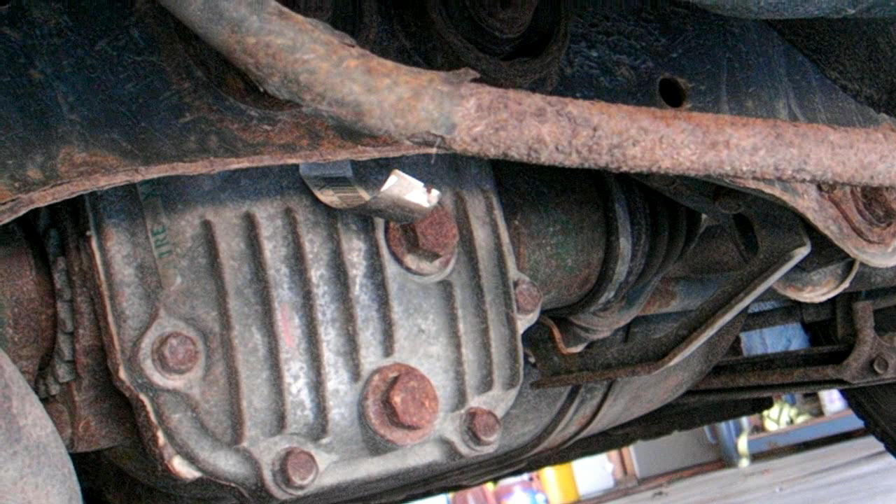Another thing on your Subaru maintenance list should be to check your differential fluid. It's filled with 80W90, and that bottom bolt is a drain hole, and the top bolt is a fill hole. You want to check that once every couple of years, unless you have a leak, then you're going to want to check it more often. But it should be filled to the bottom of that top hole. So when you take that bolt out, you should fill it until it starts dripping out that top hole. And the car should be on a level surface when you do this.

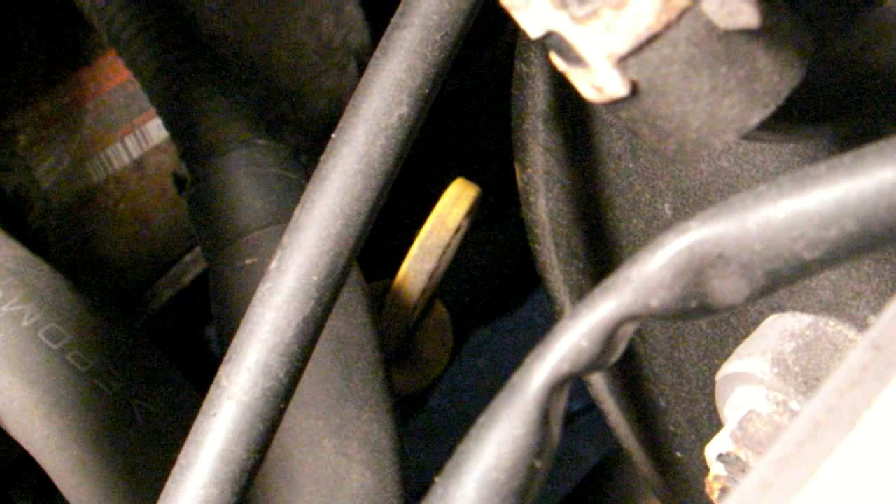Another tip for you: if you have an automatic transmission, your dipstick is going to be located on the driver's side, and it's that yellow loop there, up back near the firewall, close to the brake booster. Here's the brake booster, the yellow cap, and that's the yellow dipstick tube right there, that yellow handle. That's for your automatic transmission. Now you want to make sure the engine's running when you check that.

For the front differential, because these are all-wheel drive vehicles, there's another dipstick on the passenger side towards the firewall, way down there. It's that yellow handle. This is your air filter cover here, and there's the firewall, and that's an air conditioning hose, and way down there is a yellow handle. That's to check your front differential fluid. Now that's gear weight oil that goes in there, it's 80W90. There's a drain plug down at the bottom of the transaxle for draining that. So those are a few of the fluid checks on a Subaru all-wheel drive.

Another tip for you Subaru owners out there is your timing belt. It's right behind this plastic cover here. And if you're fairly mechanically inclined, you can change that yourself. That should be changed every 50,000 miles.

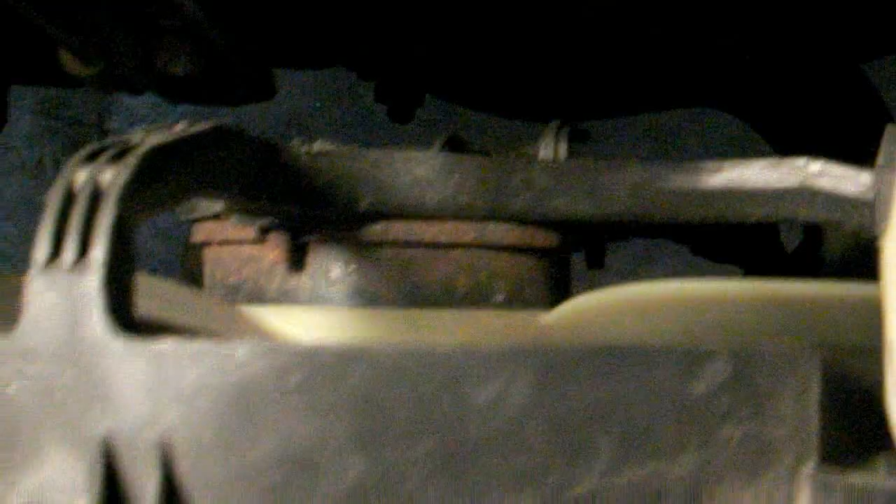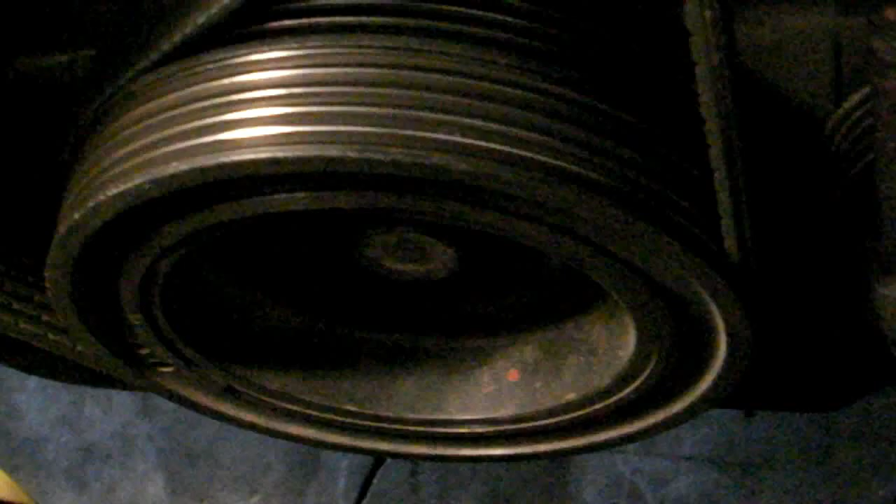What you need to do - I'm not going to take it off because I changed my timing belt about a year ago - but you're going to have to take off all your belts, take your fans off, these electric fans right here, and this bracket. Take your coolant bottle off, and then it's basically a three-piece cover. You can see there's bolts all around the edges you have to take off, and the most difficult part of the whole thing is getting this crank pulley off. Do yourself a big favor and get the proper tool to take that crank pulley off.

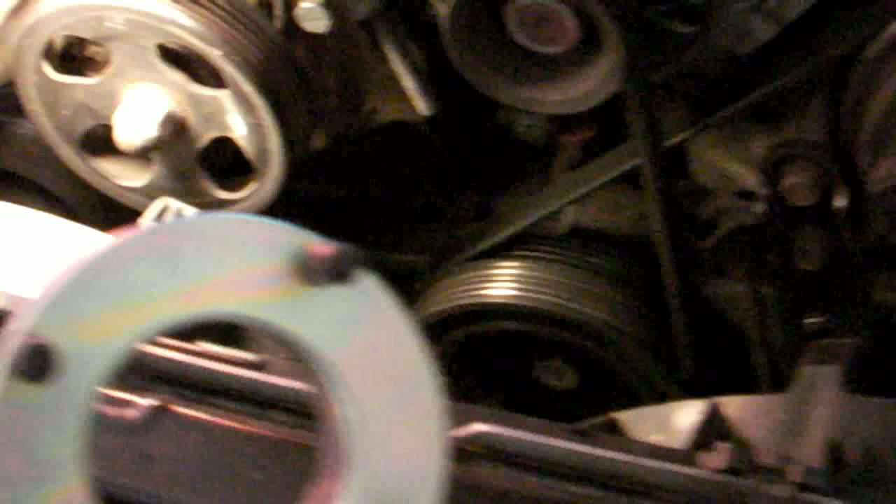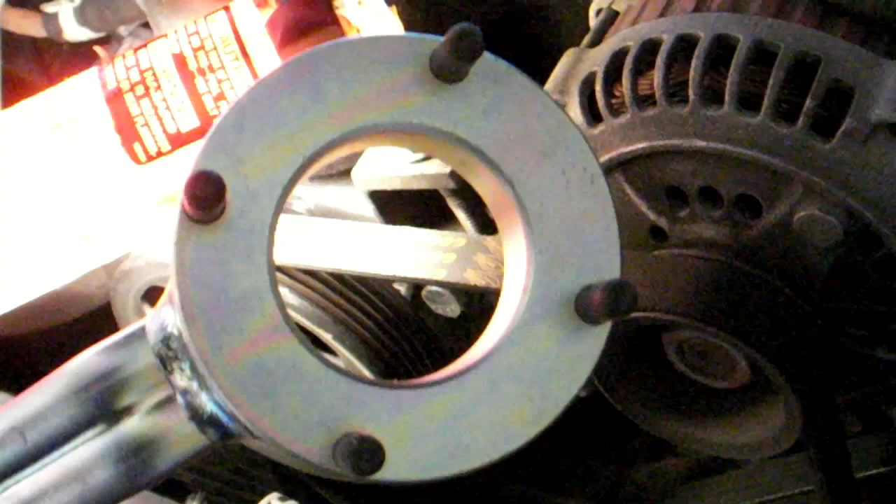This is a 98 Subaru 2.2 liter engine. This tool, I believe, will work on the 2.5 liter also. See those little prongs sticking out? Those fit right into the harmonic balancer crank pulley right there. It's a counter holder, so you put that into the pulley like so, and now you've got a really long leverage bar to hold the engine from turning while you loosen that center bolt. I'd have to look up the specs, but I think that tightens to about 100 or 150 foot-pounds. A lot of torque.

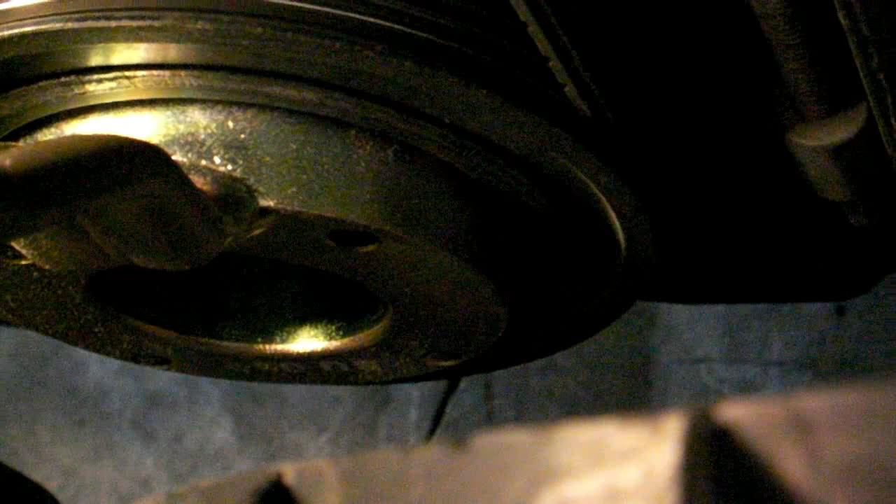If you don't get this tool to retighten it, the engine's going to spin when you go to retighten it. So best to get the tool. They're about $100 on eBay. If that crank pulley bolt loosens up after you reinstall it and you don't have it tight enough, the keyway will get all baggy in there, it'll rattle, and that may cause the ignition to retard. It may cause the computer to retard your ignition timing, and you'll probably get a code. I've seen that happen before. So this is your counter holder, it holds the engine from turning - most important tool for changing the timing belt on the Subaru.

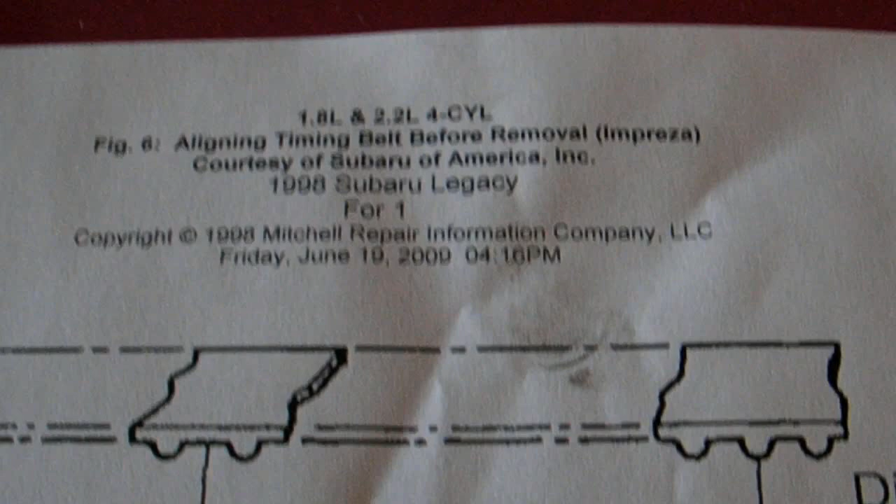Here's some more tips on the timing belt. This goes for the 2.2 liter 98 Subaru engine. The 2.5 may be a little different, and different years may have different pulleys and different type of tensioner on the belt itself.

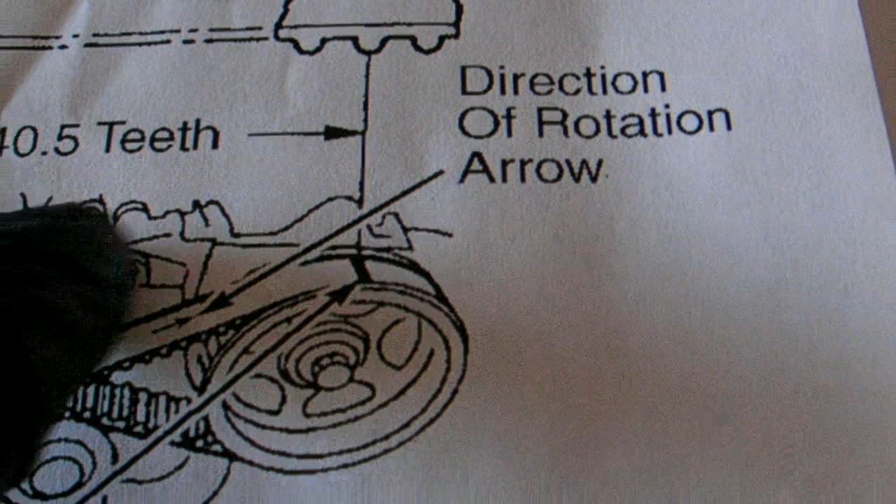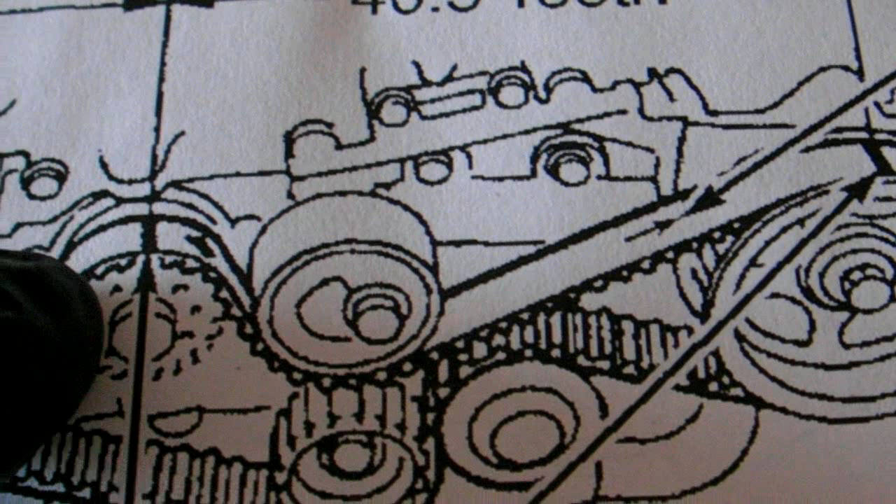But this is a diagram of the alignment for the timing belt. Make sure your arrow's pointing in the right direction, the rotation. On the timing cover itself, the little plastic part in the back there, there's going to be some dots or a little line, and you line those lines on the belt with that line on either side. And with your crank sprocket pulley right here, there's going to be a dot on the crank pulley, and you line that dot up with the top there. So you want to make sure everything's aligned, because the Subaru engine is not a clearance engine, and if you don't have everything aligned properly, you end up bending the valves in the engine when you start it.

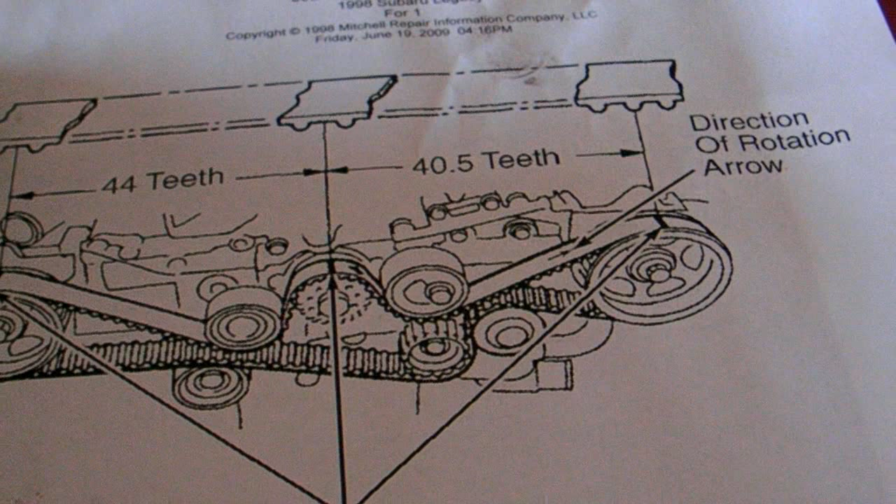So it's very important - that's another reason why you want to make sure you change that every 50,000 miles. Again, depending on the year and model of Subaru you have, the time for changing your belt may be different, but I'd recommend 50,000 miles.

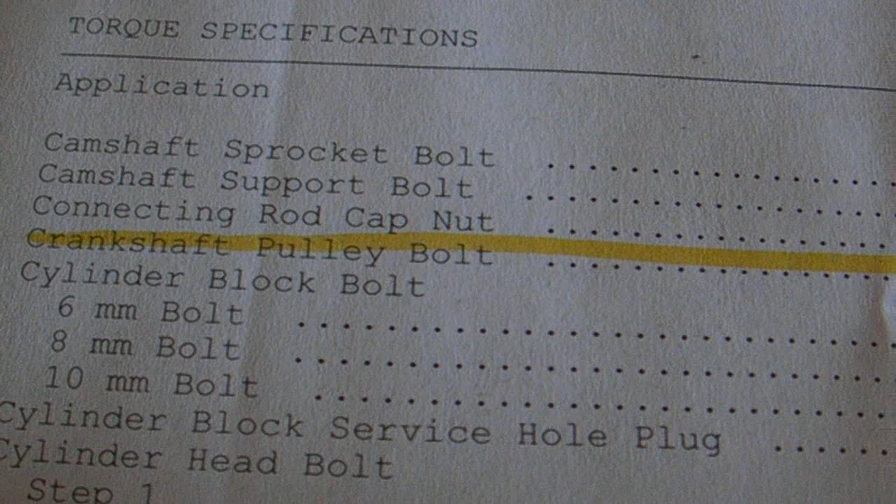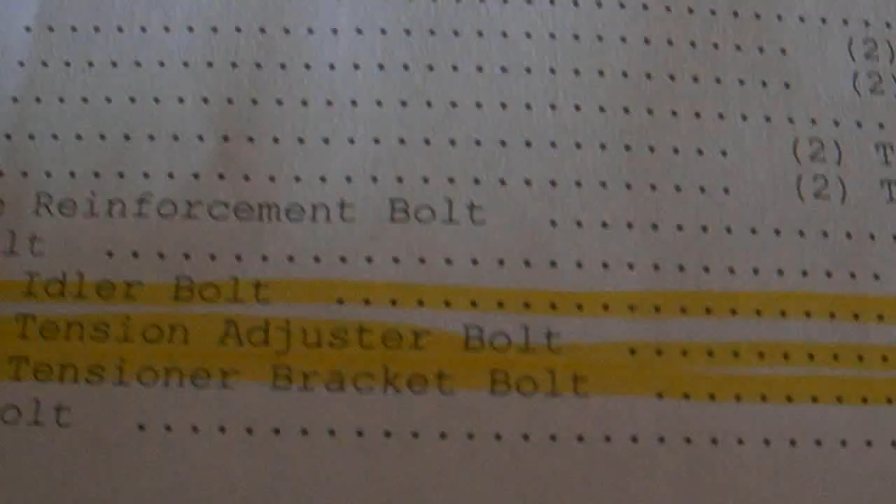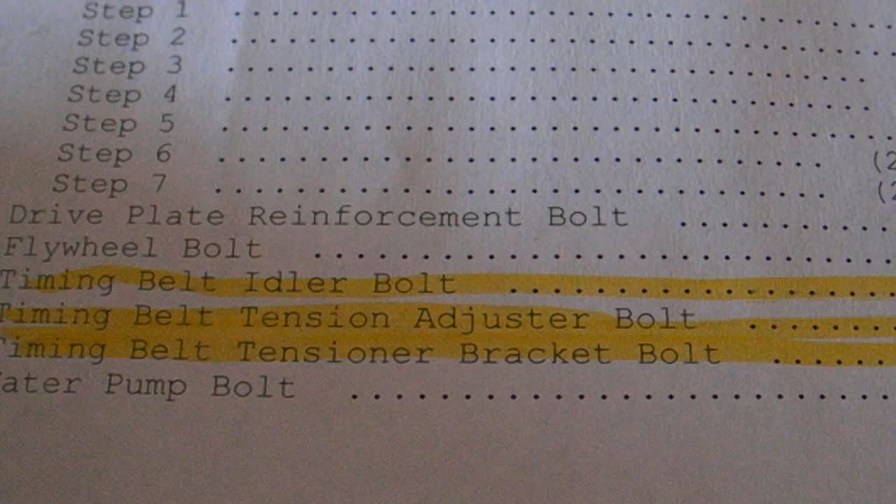Here's some of the specs for tightening. So there's your crankshaft pulley bolt, it gets tightened to between 86 and 100 foot-pounds. And then the metric is right there, what you would tighten it to if you had a metric. These are for the idler bolts, and other ones - these are the specs for those.

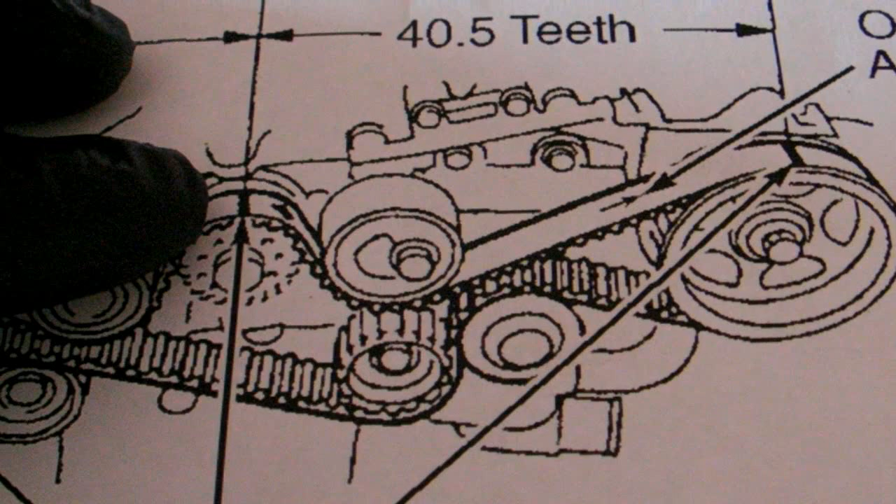Everything, as long as you have the covers off - a good thing to check if you have a leak in the front of your engine is this seal behind this drive gear right here that drives the belt. That has a tendency to leak after you get maybe 100,000 miles on the car, or depending on how old the vehicle is. It's not that hard to change as long as you have the belt off, you might as well change that, and a lot of times the cam seals will leak too. So there's some seals behind here, behind each of these pulleys.

While you have this off, make sure there's no play in your idler pulleys here, make sure the bearings aren't all worn out, and just check them all. Just kind of take the pulley and move it a little bit. If it rattles quite a bit, or if it's tight, change them as long as you get it off.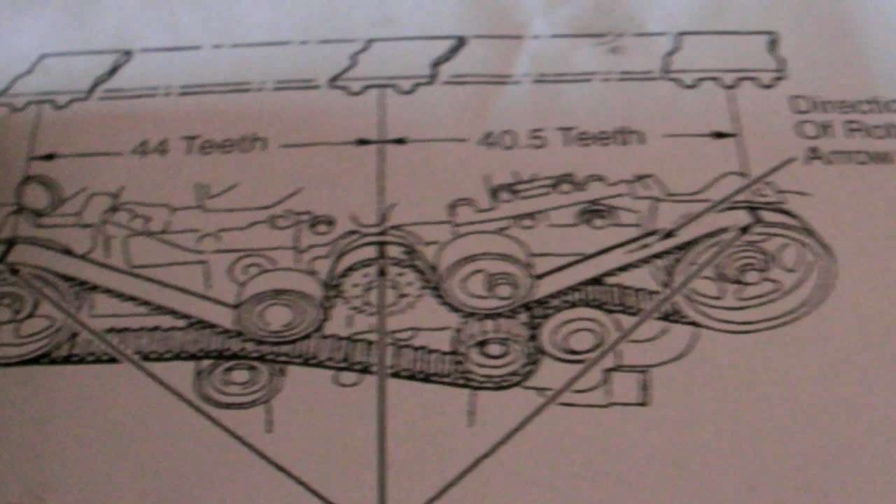Another thing, this is the water pump right here. To change the water pump, you have to take the timing belt off. So if you have a coolant leak in the front, that may be your problem. Some people like to change that after you get 150, 200,000 miles on your engine. Me personally, I'll just wait for it to start leaking - it's not going to be a catastrophic leak. It'll start out as a real tiny leak, and you'll catch it and change it when it needs to be changed. So there's some tips on Subaru.